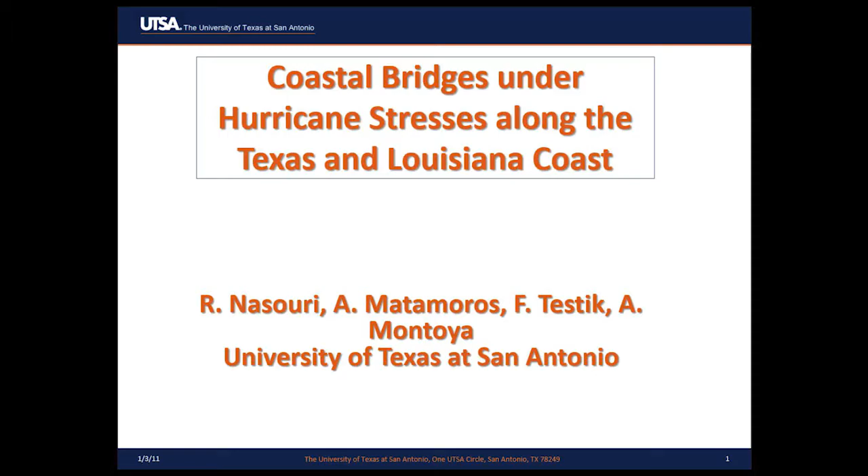One of the things I've done in my career is work in earthquake engineering and field inspection. Many years ago, after an earthquake in Peru, I went there and saw they built their houses with adobe. A lot of people died after the adobe houses collapsed, and I couldn't help but notice people picking the adobe blocks from the collapsed houses and building their houses again using the same materials and methods.

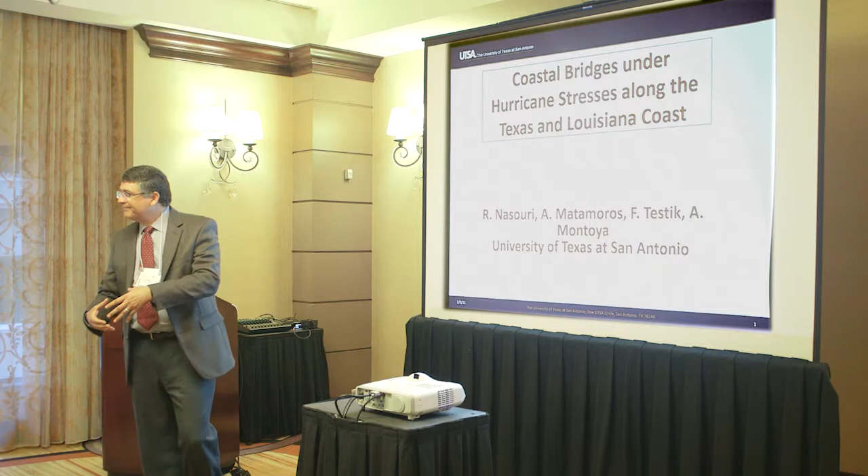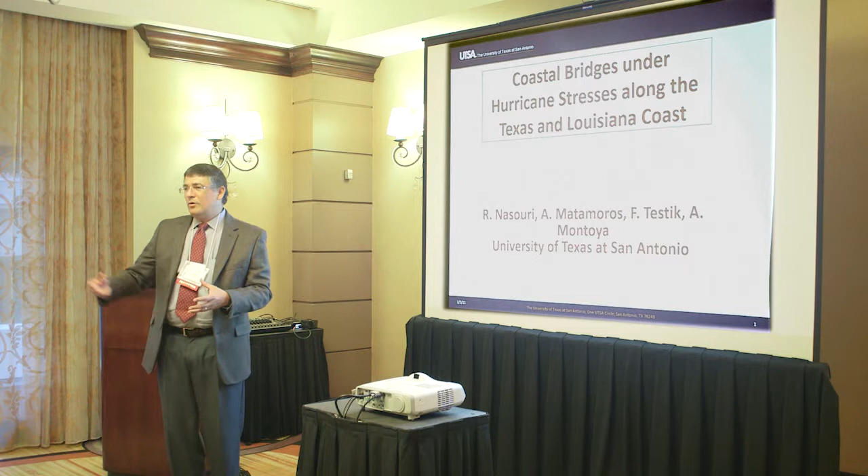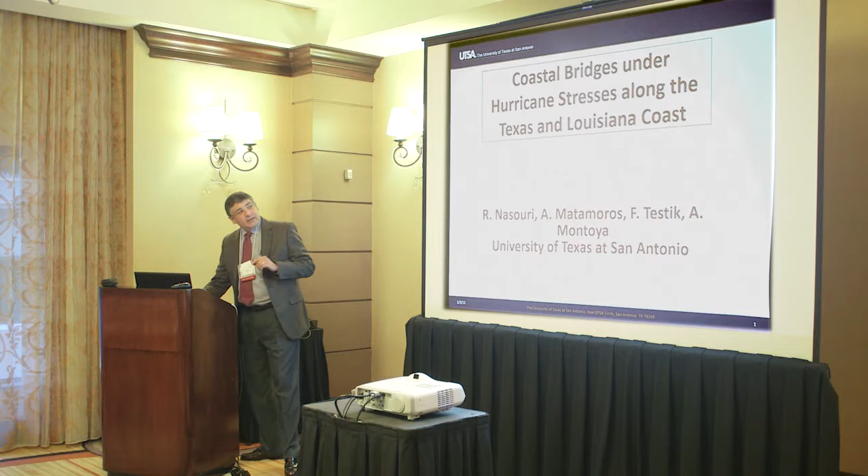A few years later, I was in Bingöl, Turkey, and had the same experience. There were evidently construction methods and materials that were deficient, and you walk down the street five days after the earthquake and they're continuing their construction with the same methods and techniques. You'd think that only happens in rural Peru or rural Turkey.

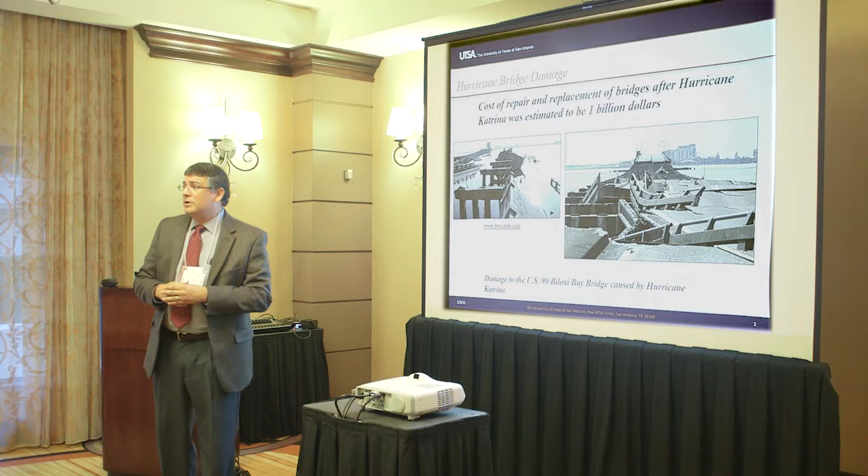The motivation for the study is that when we had the experience with Hurricane Katrina, we got hit pretty hard in our bridge infrastructures. Estimates of how much it costs to repair those bridges or replace them, in many instances, was upwards of $1 billion.

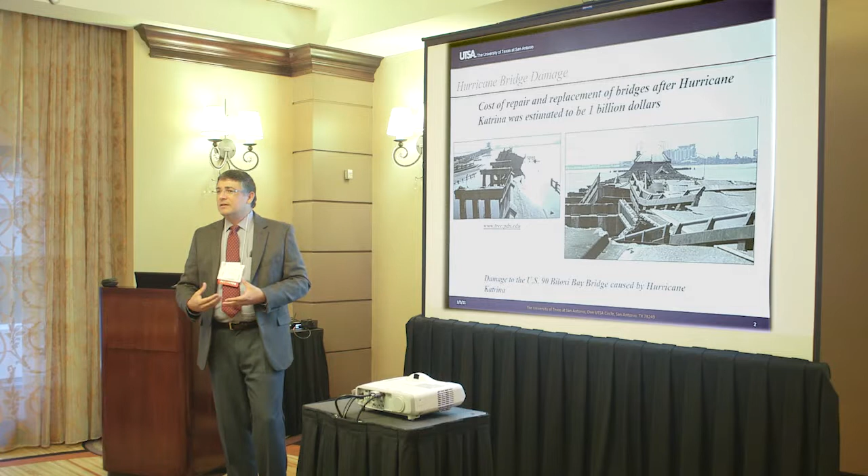When we think about it, I think we're following the same approach as people in rural Turkey and rural Peru, in that we're rebuilding our infrastructure. Maybe we looked around and some people made empirical observations of what worked and what didn't work so well. Maybe we're doing a little better, but we haven't adopted a systematic approach to learn, estimate the risk, and make more risk-informed decisions. That's the motivation for this project.

When a hurricane impacts a bridge, it generates horizontal forces and uplift forces, and there are simple equations used today to estimate that. Of course, the limitation of predictive approaches is that they don't tell you what to expect in terms of damage. Will the bridge be damaged? Will it not be damaged? Will it be functional, or would it have to be shut down for 10 days, 20 days?

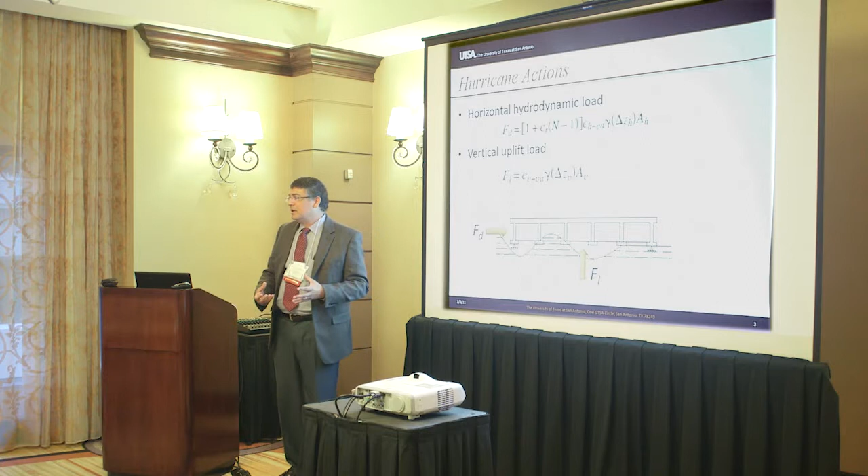As we progress and try to make more informed decisions, we need tools we can use to make estimates, scenarios of what's going to happen under different hurricane conditions.

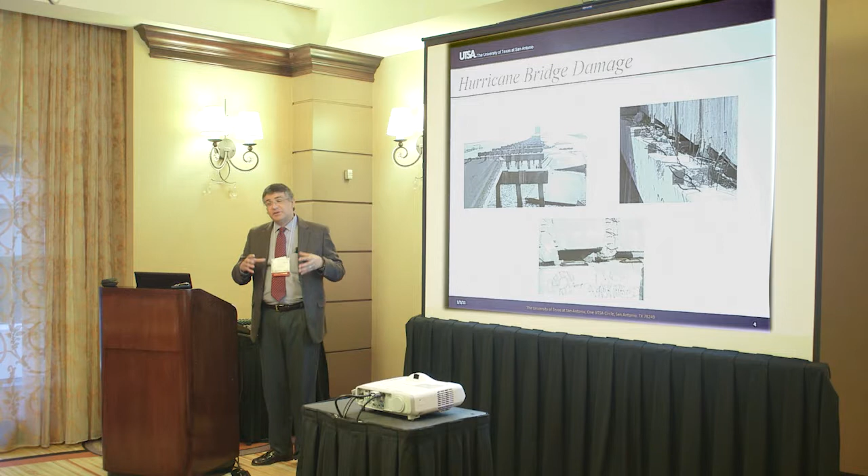One of the biggest problems we had in Katrina was that bridge superstructures were unseated. That leads to observing the properties of the bridge connections, and there was damage and unseating in bridges with a multitude of different support conditions. Some were integral, and the forces were so strong they managed to destroy and damage the integral connection. So we can't just say let's put shear keys in every bridge and that's going to fix the problem, because we have evidence to the contrary.

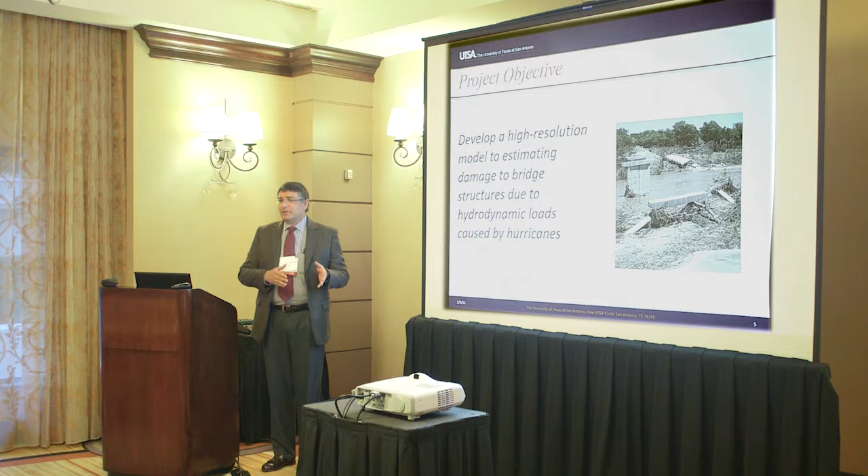So what are we trying to do? We're trying to develop a high-resolution model, using newer, more sophisticated techniques to simulate a bridge under hurricane attack and understand what happens to it, not only when the bridge is in pristine condition, but also as the damage progresses, so we can estimate different scenarios of damage.

This is the very first step, if you wish, in the process of thinking of this problem as a resiliency problem. We need to be able to have models that tell us what level of damage is going to occur depending on what we do with the bridge.

As far as this project goes, this is a very lofty, big problem. We can't tackle it in a year, so we chose a very small subset of it. As I was mentioning, we're trying to use new multi-physics methods.

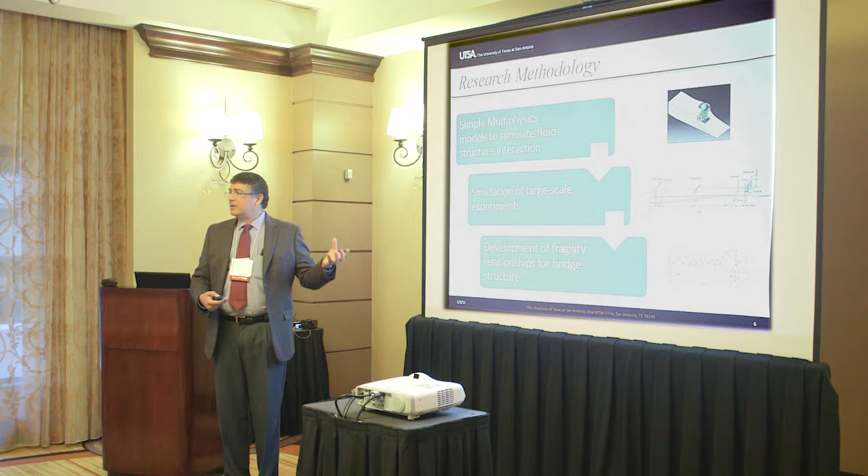Finally, the ulterior goal is to create different scenarios for hurricane conditions that we can impose on prototypical bridge structures. We can look at different bridge geometries and different support conditions, and understand the probabilities of damage for each one, and which ones are more resilient. Is there a way to reduce $1 billion worth of damage in a future hurricane like Katrina?

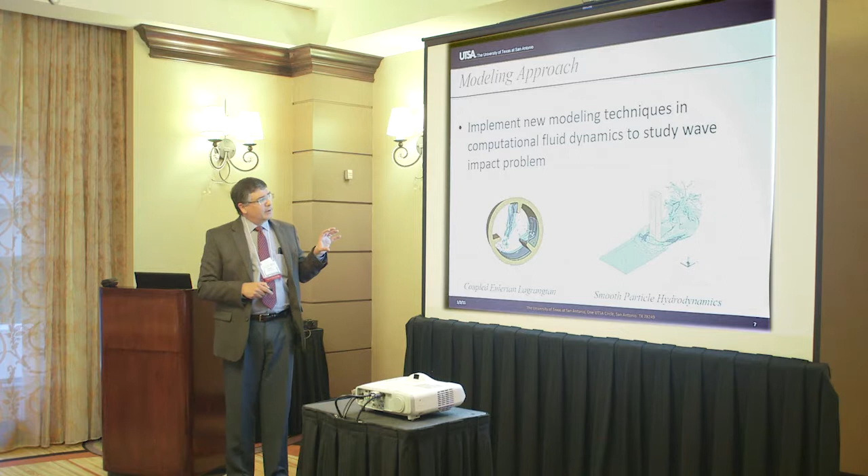So these are a couple of techniques we focused on. The first one is coupled Eulerian-Lagrangian analysis—people in the finite element industry are beginning to use this on a smaller scale. The other one is smooth particle hydrodynamics.

When we started the project, we were open-minded, trying to look at which one to use. They each have their benefits and their costs, and the software and knowledge is a little more mature in the one on the left, so we got started with that one.

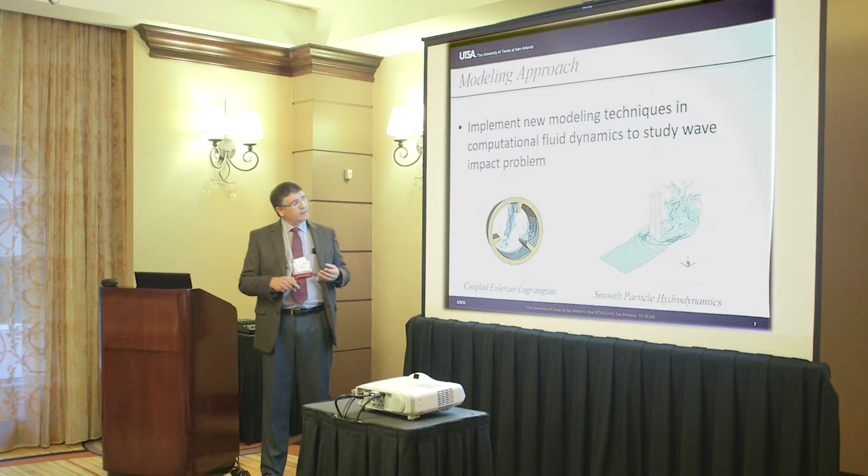What we mean by coupled Eulerian-Lagrangian approach is that in structural analysis, which is my field, we typically use Lagrangian meshes. We create a mesh that has its nodes, and when we apply stresses or forces, the mesh deforms. So we track the deformation that goes between the undeformed state and the deformed state.

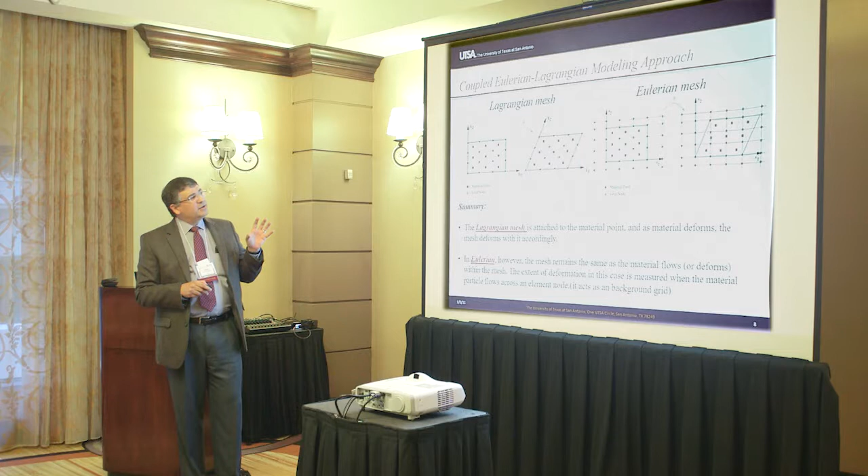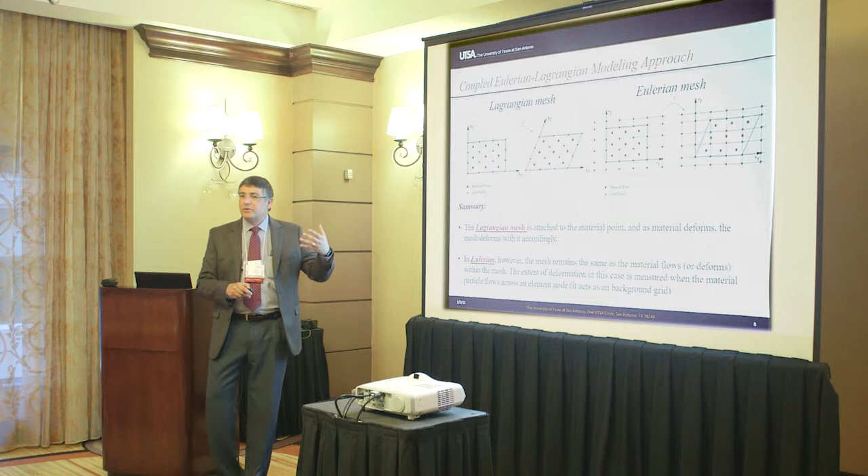Eulerian mesh is a different animal, it's a different beast. In this case, we create the mesh, but the mesh doesn't deform, the material moves. So what we track is the flow of the material through the mesh, as opposed to tracking the way in which the material deforms.

And of course, there are differences between the two. One of them, as I mentioned, we have nodes that move, and the other one, the nodes are fixed. In this one, the material stays put. In this one, the material flows.

There are issues regarding the computational cost and suitability. For example, boundary conditions: it's very straightforward to define the boundary condition on a Lagrangian mesh. We know that the element is fixed. There's no changing that. When we deal with Eulerian meshes, we deal with conditions like inlets and outlets of fluid.

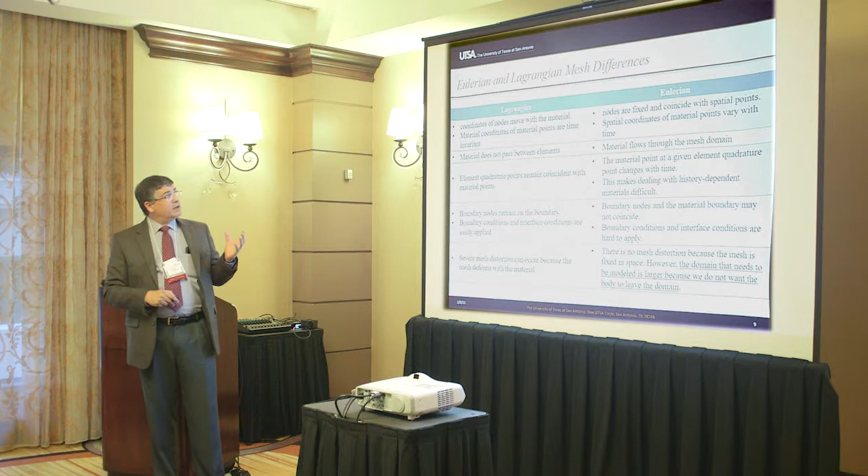It becomes a much more complex problem to define the boundary conditions problem. Of course, on the other side of that, if we get severe mesh distortions in a Lagrangian mesh, a solid distorts too much, then we get bad numerical problems. And that is not a problem for the Eulerian meshes, and that's why we like them for fluids.

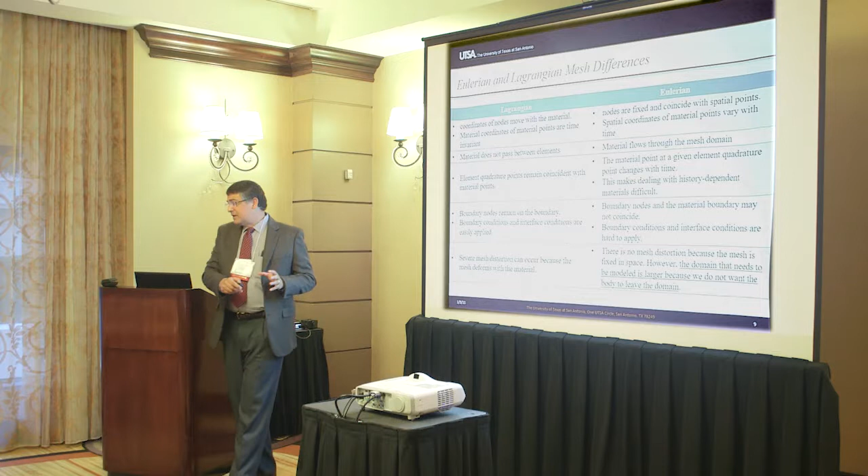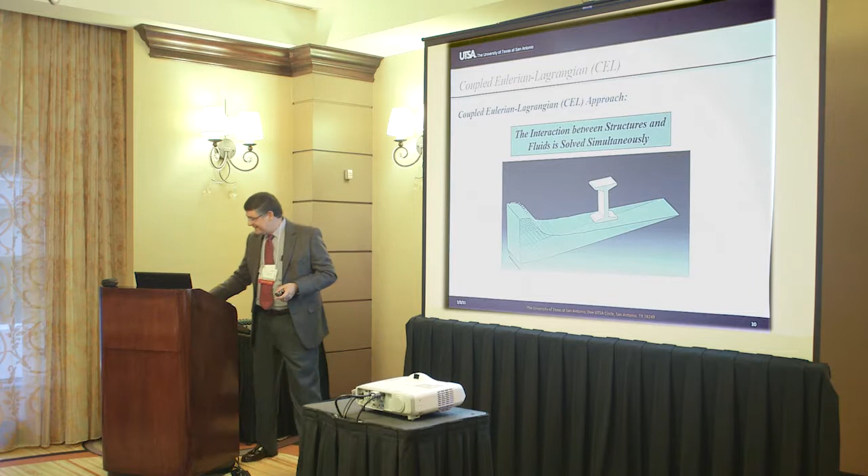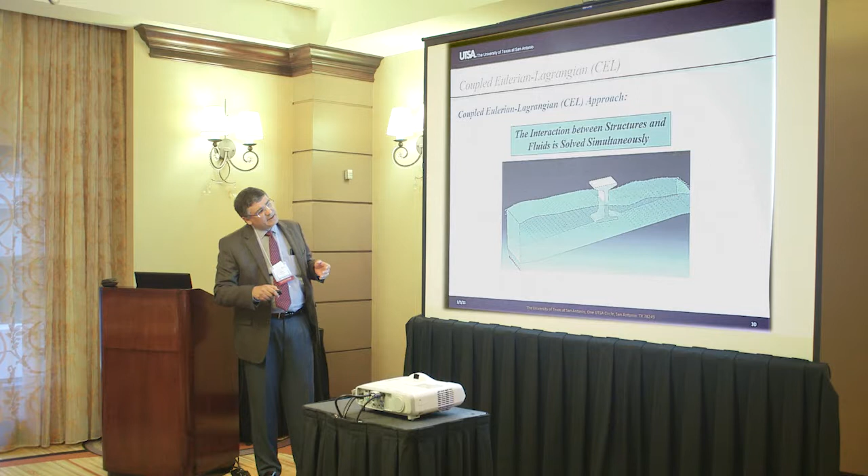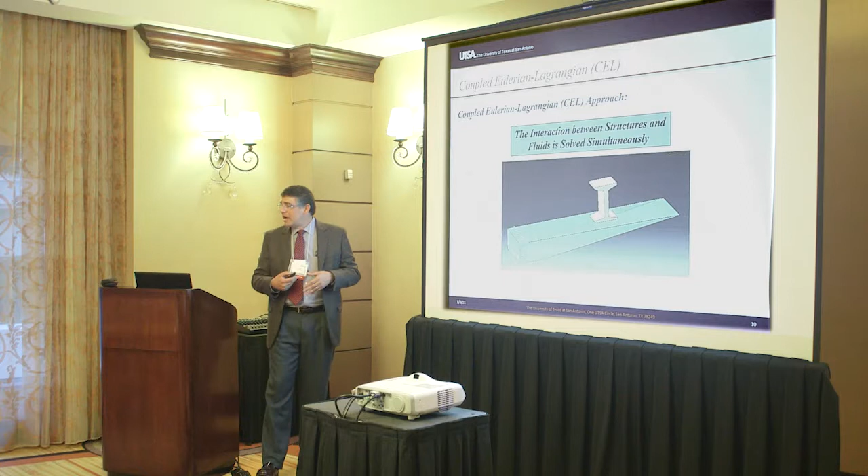What we're trying to do is to integrate these two, get them to coexist and act together. So this gives an example of a solution, one of the models that we run where the fluid interacts, but the equations of equilibrium and the equations of state of the fluid are solved simultaneously, and one informs the other. So the two types of meshes are interacting throughout the solution.

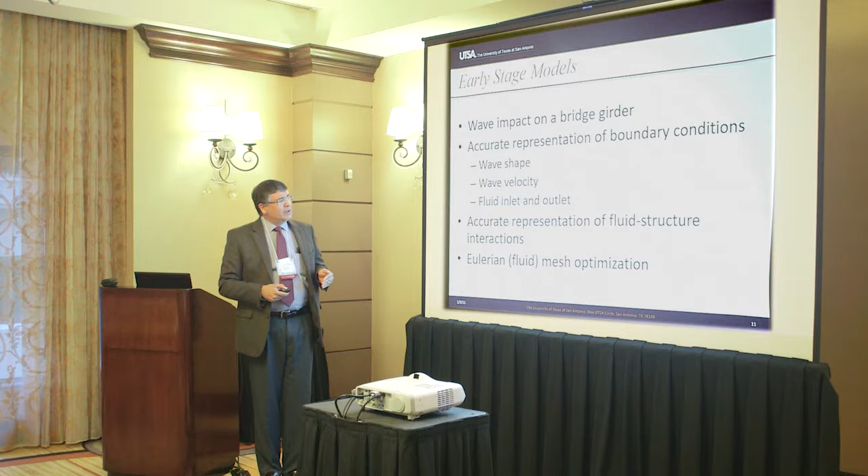First stab at this is to begin to get a handle on applying these methods to the bridge problem and to the wave impact problem in bridges more specifically. So we started very simple models because we're concerned about things like generating the right wave shapes, the right wave amplitudes, wave velocities, making sure that we got inlet and outlet conditions simulated properly, and of course that we get an accurate representation of the fluid structure interaction.

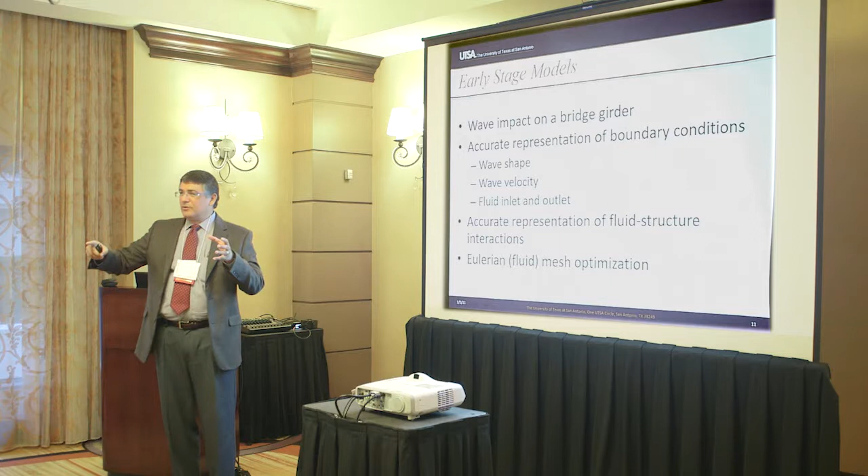The water impacts the girder, it needs to find a path around it, it can't go through it. Then from my colleague who works in fluid dynamics, we look at the turbulent flow around the girder to make sure that's a suitable and reasonable solution.

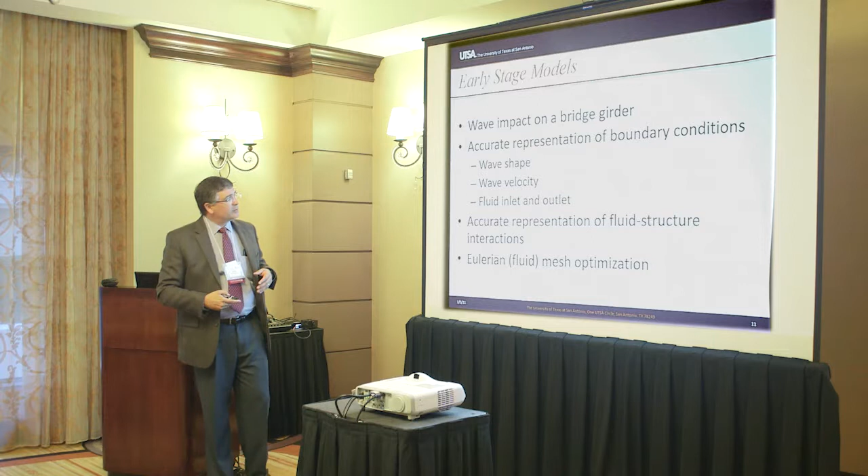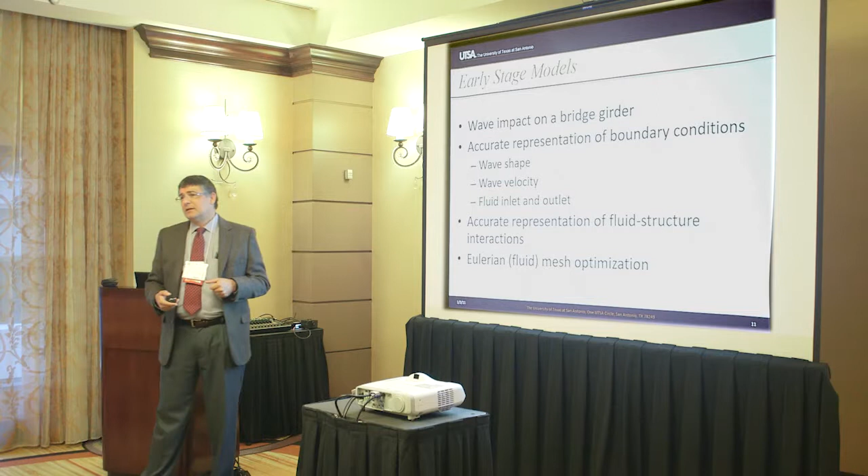Last but not least, these are methods that are very computationally expensive. To give you an idea, when we first got started, it would take us approximately 7 days to run one of our models. We're down to optimizing them to about 1 day of running.

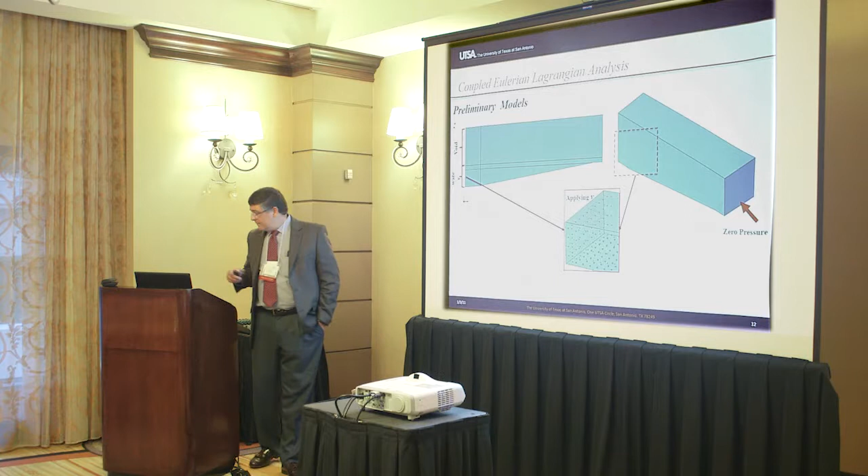So as I mentioned, some of the complexities that we face: we modeled the Eulerian fluid. We need to define regions in which there's going to be water, regions in which there's going to be void, and the boundary conditions need to be defined correctly.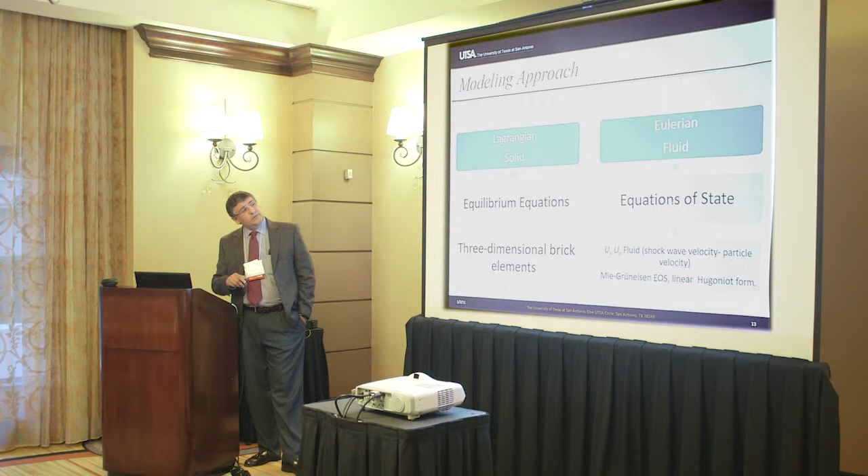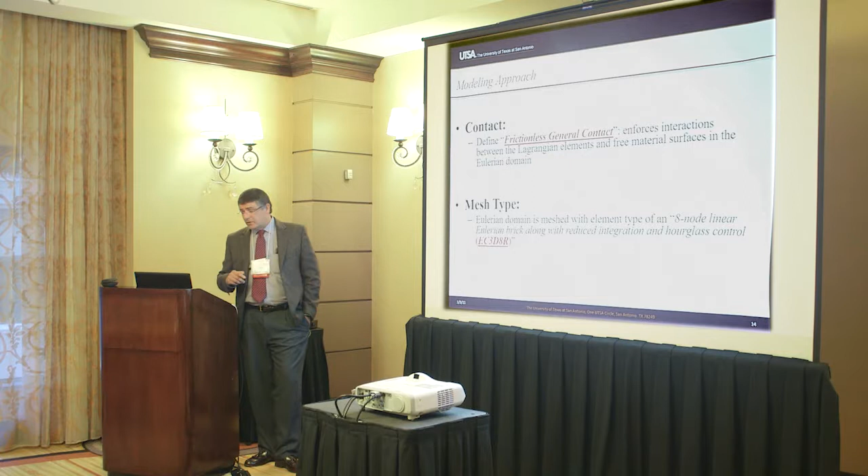As I mentioned, in the Lagrangian world, we think in terms of equilibrium equation. When we talk about fluids, we work in terms of equations of state. And we need to be very mindful of the different types of contact interaction between the two to make sure that they're simulated properly.

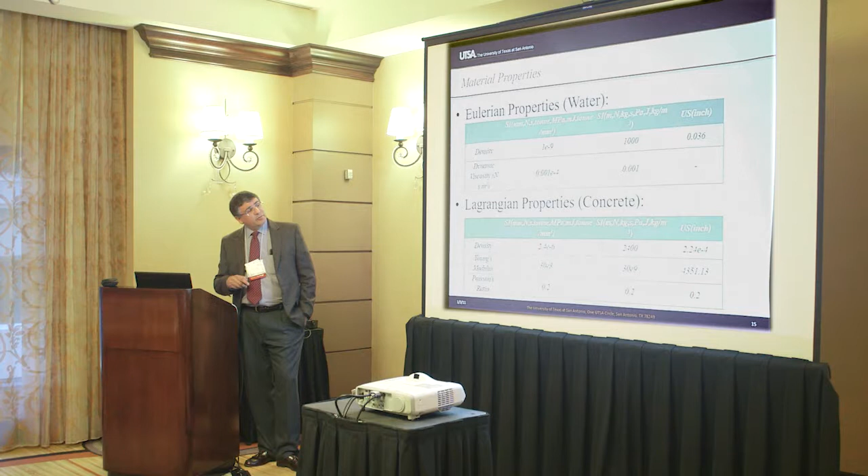Other than that, we define material properties. In this case, for concrete, for the girder, water, and water density and viscosity are important properties. In concrete, we think in terms of Young's modulus and Poisson's ratio. So first stab at the problem is just to be able to simulate waves to make sure that we have the right height and frequency, that we're imposing our boundary conditions correctly.

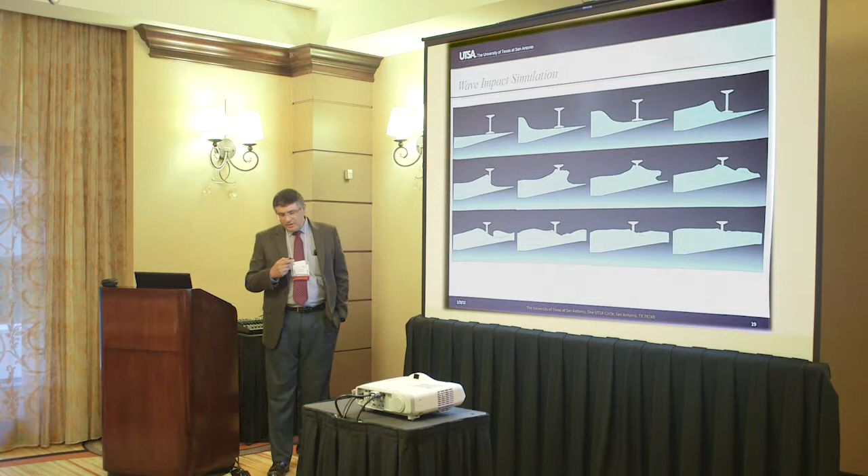This gives more of a progression. We want to make sure, for example, that the water, when it hits the girder, goes around in this case, and it creates then an area behind the girder where there is a void.

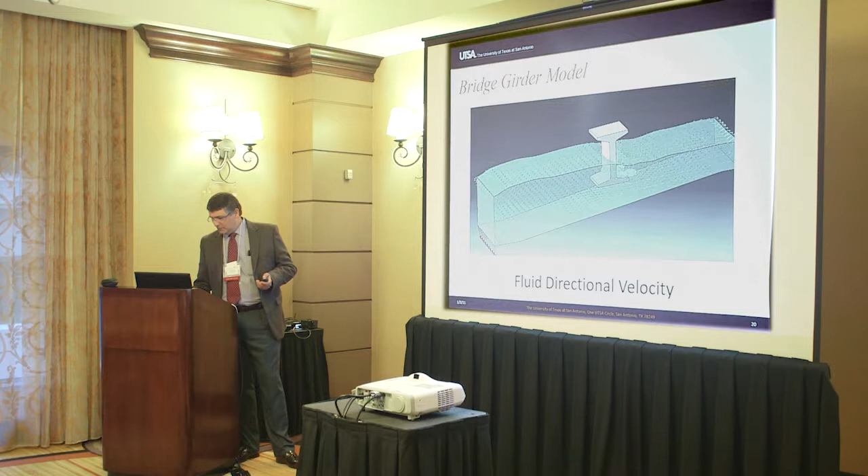Some of the things that concern us is, for example, simulating the velocity. You can see here what's happening with the fluid. And then, of course, there is the other side, which is what's happening in the girder itself. So we track stresses and make sure that we get reasonable results.

At the present time, we're working on calibrating. As I mentioned, there are a couple of experiments. One was a platform problem that was performed in 1969 by French in a wave tank. There were a couple of variations of that. The other one is the tsunami basin in Oregon State with the wall.